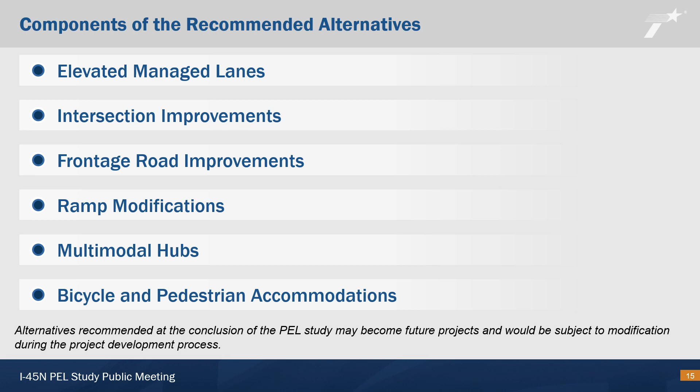The recommended alternatives may advance in the project development process as individual, potential future projects proposing to improve I-45 between the limits captured in this PEL study. Each project would undergo schematic design, environmental review, and final design before construction would occur. Public involvement and stakeholder engagement would continue through each stage of the project development process. The schedule and duration of each future project would depend on the complexity and cost of the improvements.

There would likely be 3 types of projects. Short-term projects would be spot improvements with potentially minor impacts and construction completed in a short duration. Mid-term projects take more time due to increased potential for impacts and design complexity. Long-term projects typically have a higher cost, potentially more impacts, and longer-term construction that would extend over multiple years.

Each of the recommended alternatives have been classified as a short, mid, or long-term project based on the anticipated complexity and cost.

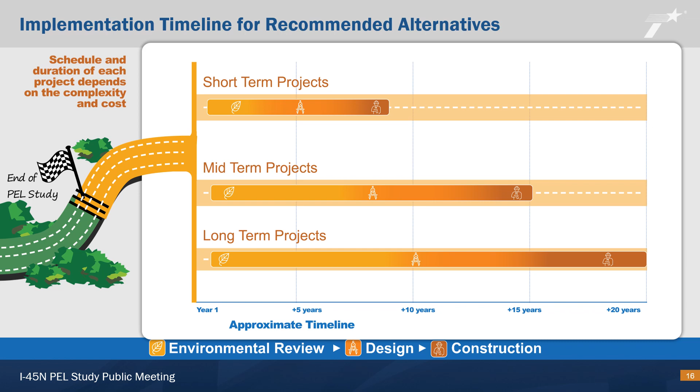The first recommended alternative is a long-term project that would construct an elevated structure along I-45 North to provide 2 managed lanes in each direction and a shared use path along each frontage road. The types of users allowed on the proposed managed lanes would be determined during the environmental review and public engagement process. The number of main lanes and frontage road lanes would be maintained along the existing pavement, resulting in no major reconstruction of the main lanes or frontage roads.

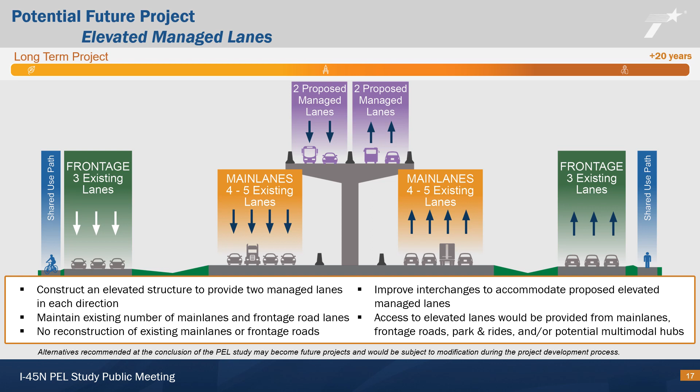Improvements at the interchanges with Beltway 8 North, State Highway 99, Hardy Toll Road, and State Highway 242 would be needed in order to accommodate the proposed elevated managed lanes.

With the elevated managed lanes alternative, access to the elevated managed lanes would be limited to several key locations to improve operations. 5 locations were identified as potential access points between the main lanes, frontage roads, and the proposed elevated lanes based on travel patterns.

These locations would be north of Beltway 8 North, north of FM 2920, north of Hardy Toll Road, south of State Highway 242, and south of Loop 336 South. Access would also be provided from the existing Kuykendahl Park and Ride. Future park and rides and multimodal hubs may also directly access the proposed elevated managed lanes.

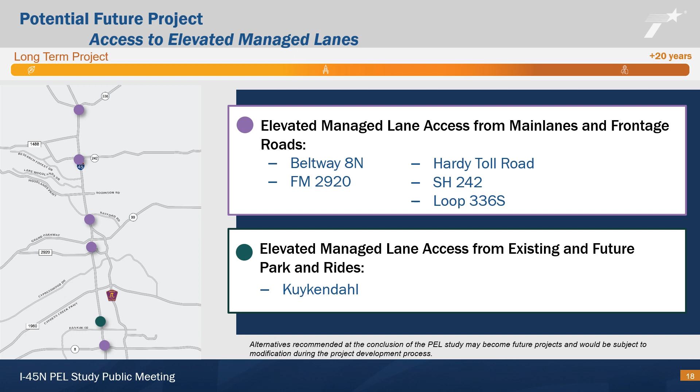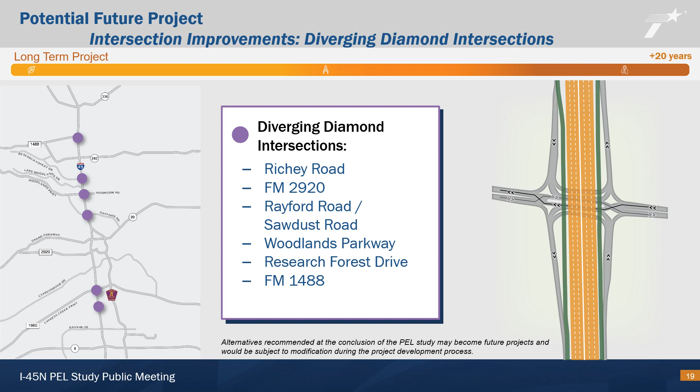Additional long-term recommended alternatives are the turbo roundabouts proposed at the Hollow Tree Lane and Louetta Road intersections. The proposed roundabouts would utilize the existing configurations while allowing full directional access at each intersection. The proposed improvements are anticipated to reduce driver confusion and improve operations.

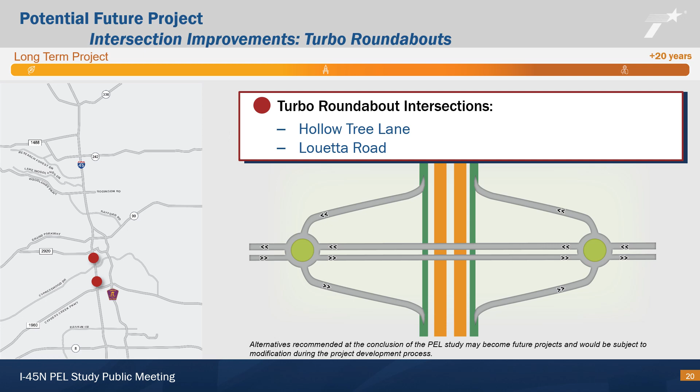A variety of short-term improvements are recommended at 7 frontage road intersections to address safety and operational issues. The frontage road and intersection recommendations include improved signage and pavement markings, optimizing signal timings, turn lane modifications, additional acceleration lanes, and safety improvements at driveways.

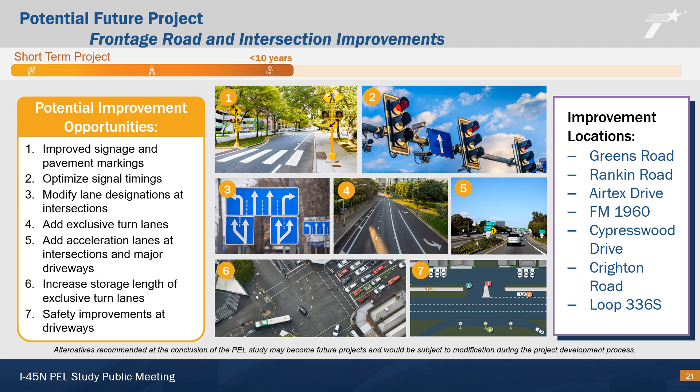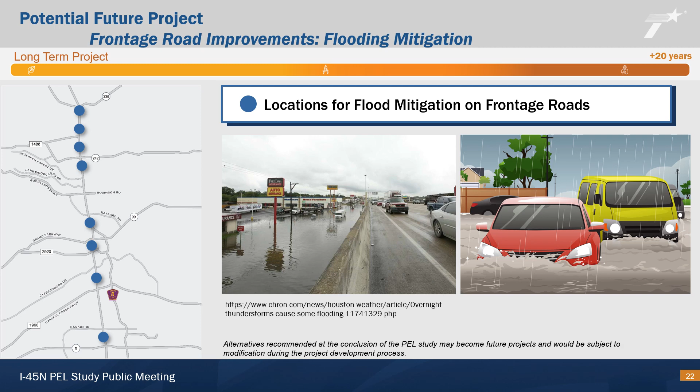A review of existing drainage conditions identified 8 existing water crossings that would benefit from flood mitigation along the northbound and southbound frontage roads. Most of the identified frontage road locations have had a history of flooding issues, and some locations experienced full closures during past flooding events, such as Hurricane Harvey. Flood mitigation improvements could include roadway or bridge reconstruction, roadway elevation changes, culvert modifications, and stormwater management.

The current ramp configuration usually includes a short spacing between adjacent ramps on the main lanes. Between the ramps, entering vehicles are accelerating and merging onto the main lanes, and exiting vehicles are decelerating and changing lanes to use the off-ramp, which causes safety and operational concerns. The proposed ramp reversals allow the lane changes to occur along the frontage road, where speeds are lower and the spacing between the ramps is greater.

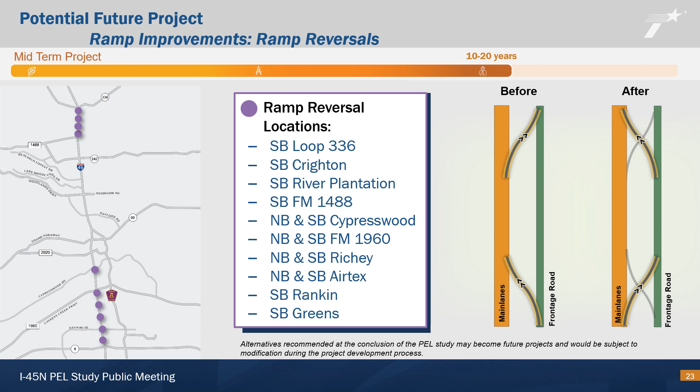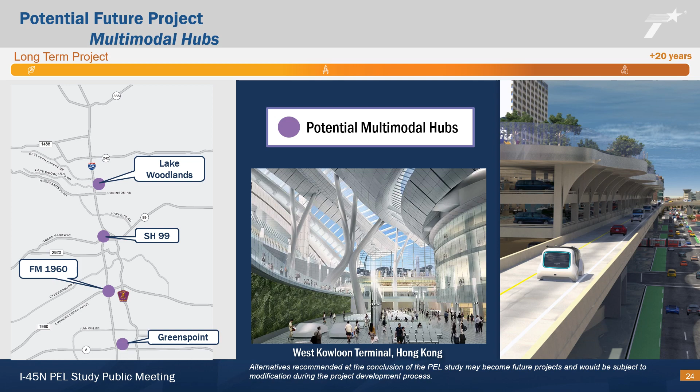A travel demand evaluation resulted in the identification of 4 locations along I-45 North that are anticipated to benefit from a potential multimodal hub. The potential multimodal hubs would require a public-private partnership between several entities, including TxDOT and transit agencies. The photos shown here on this slide are for illustration purposes. The actual appearance of any future multimodal hubs would be subject to schematic design, environmental and public review, and final design.

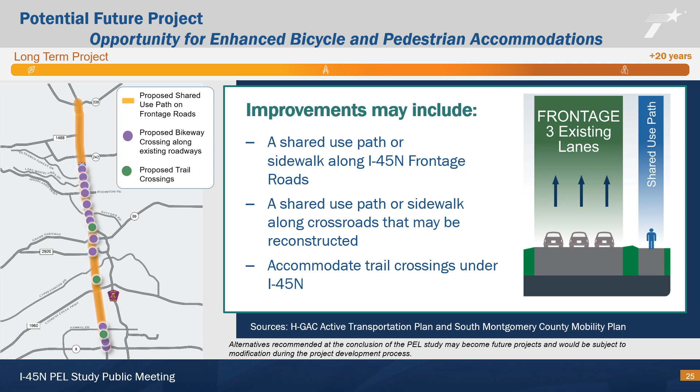The I-45 North PEL study began in spring of 2017 and is expected to be complete in early 2024. Stakeholder and public engagement has been held throughout the study to gather input at each milestone. 8 stakeholder meetings have been held to date, along with several individual stakeholder meetings.

A final stakeholder meeting is planned at the study conclusion to present the final study recommendations and the final documentation. 3 open house public meetings have been conducted, with this being the 4th and final open house public meeting. The materials presented at each of the stakeholder and public meetings are available on the study website.

Each stakeholder and public meeting provided the opportunity for input through conversations with project staff, surveys, mapping exercises, comment forms, and more. Throughout the PEL study, we received over 1,000 survey responses. Thank you for your continued engagement and valued input. The input received was used to develop the recommended alternatives presented today.

Future projects would have additional stakeholder and public meetings with continued opportunities for engagement and input. After the conclusion of the PEL study, the proposed recommended alternatives may become future projects.

Although the PEL study included a high-level evaluation, each recommended alternative would be evaluated in greater detail during the project development process. The recommended alternatives could be standalone projects, a combination of several into one project, or added to another planned project. These projects could be funded and sponsored by TxDOT or another agency or jurisdiction.